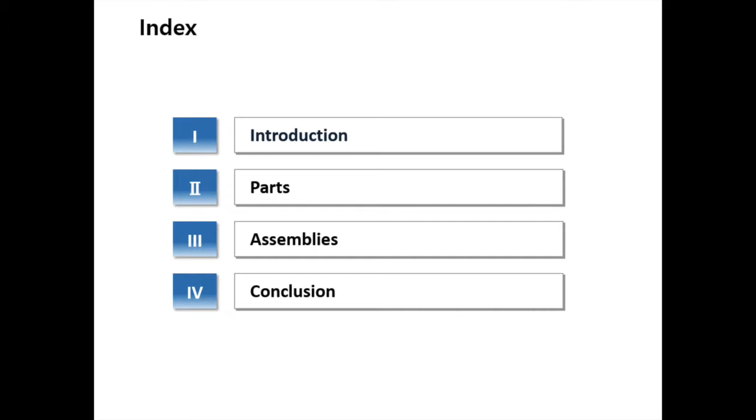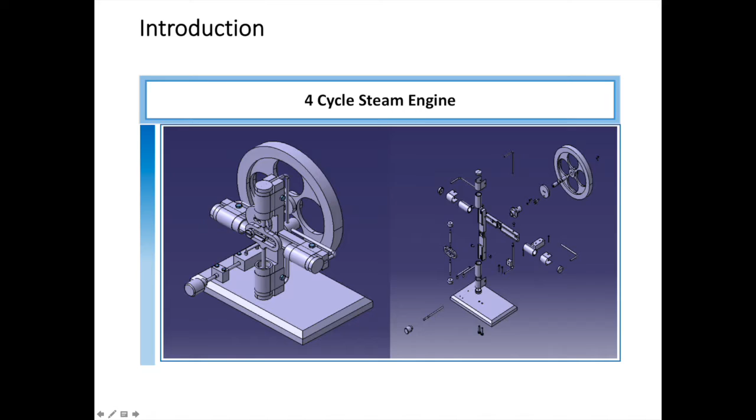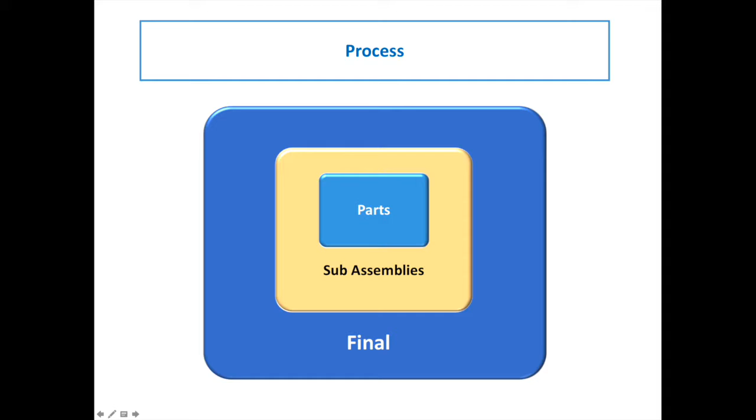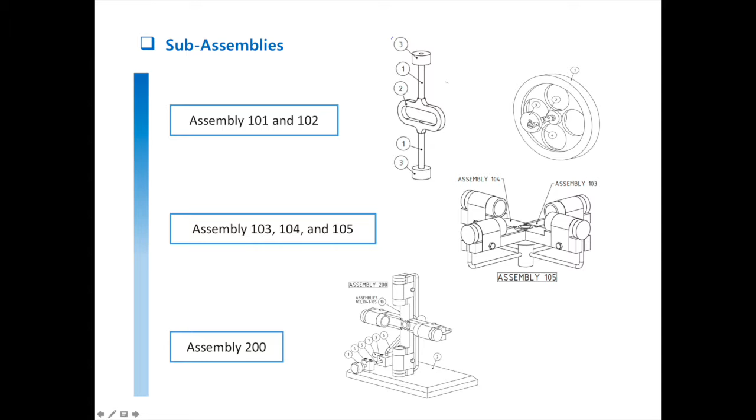For the 4-cycle steam engine assembly, we divided it into 3 big sections. One is assembly 101 and 102. The second one is assembly 103, 104, and 105. And the last one is assembly 200. So I will start with introducing the parts for the sub-assembly in assembly 103.

So I have made a cylinder, for which I used a circle, which I padded out, and then I used the hole function to cut out the hole all the way through. And for the cylinder top, I made another circle with a pad, and then I added another pad within that circle, and then I created 2 holes on the sides.

And for the horizontal beam, I made the front view as the base sketch, and then I padded it outside, and I used the pocket function and the hole function to create it all. And for the cylinder fastener, I just used the arc and padded it out using the profile sketch, and then I used the hole function to pocket the 2 holes. And over here you can see the sub-assembly.

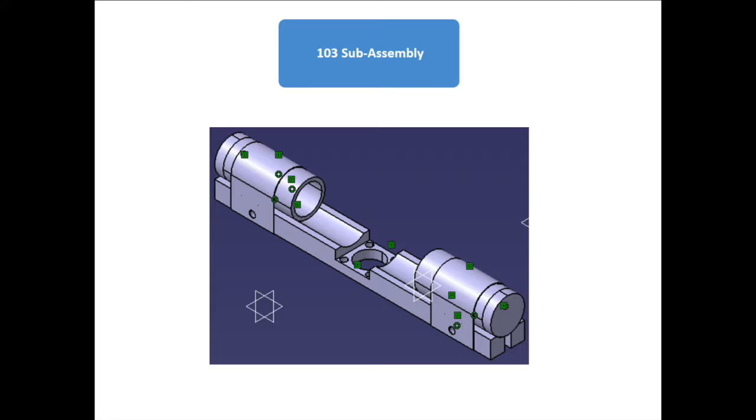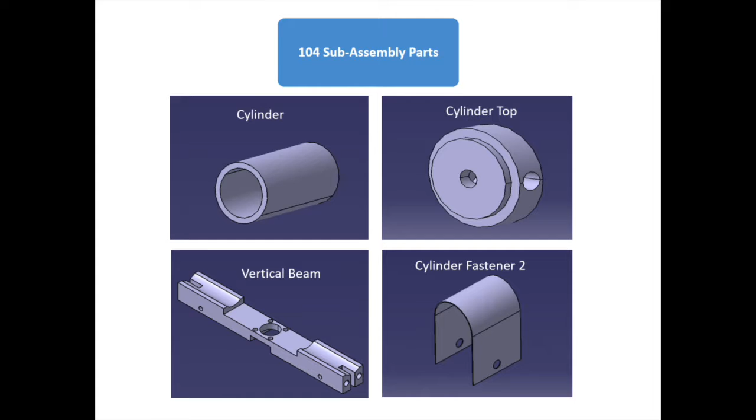And for assembly 104, I did the cylinder and cylinder top as I've mentioned before. And for the vertical beam, I used the same procedure I used in the horizontal beam, which is taking the front view and using that as a base sketch. Also, I have used the same procedure for cylinder fastener 2 as the one I used in cylinder fastener 1. And this is the assembly for 104.

Now for the overall assembly, assembly 200, I made the reversing valve knob, which includes padding and the hole function. For the base plate, I used a chamfer and the hole function to make all those 6 holes. And for the reversing valve housing, I used the pad function from the squares, and then I also used the hole function, and I've used the same procedure for the spindle bracket.

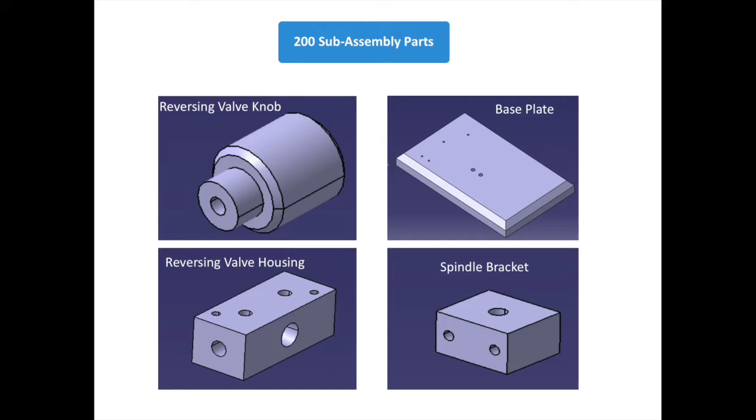Now for the reversing valve, crankshaft bearing, exhaust pipe, and fresh steam inlet pipe, my friend Hyunwoo has made those parts, so I'll just describe how he made them. So for the reversing valve, he used the shaft function, so he just created the profile along the longer cross section, and then used the shaft function.

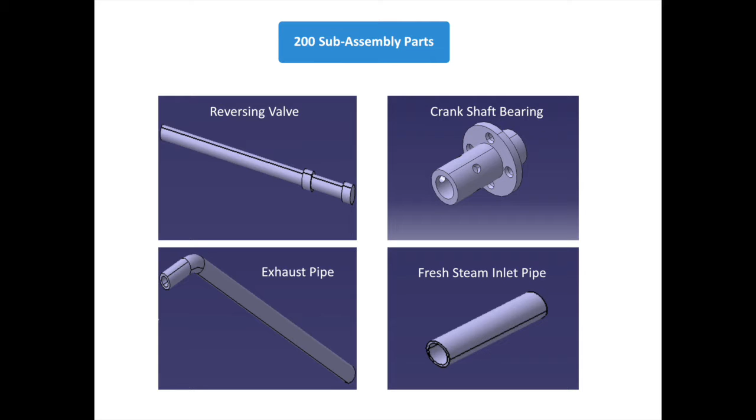For the crankshaft bearing, he used a bunch of circle pads and then he used the hole function to create the holes. And for the exhaust pipe, he created a cross section using the lines in the sketcher for the profile, and then he used the shaft function again to create that circular pipe. And for the fresh steam inlet pipe, which I made, I just used a regular pad function with another pocket.

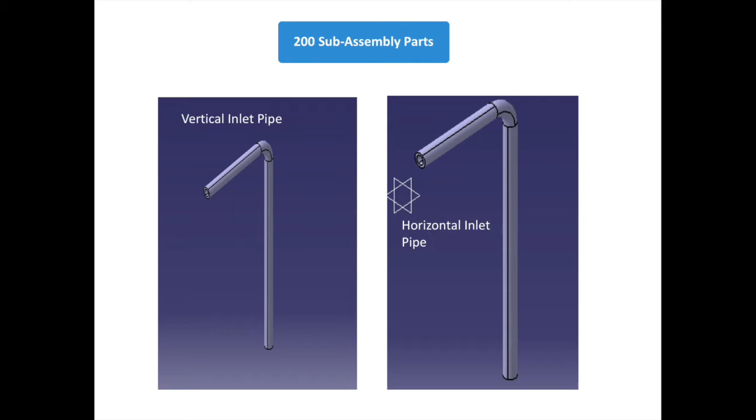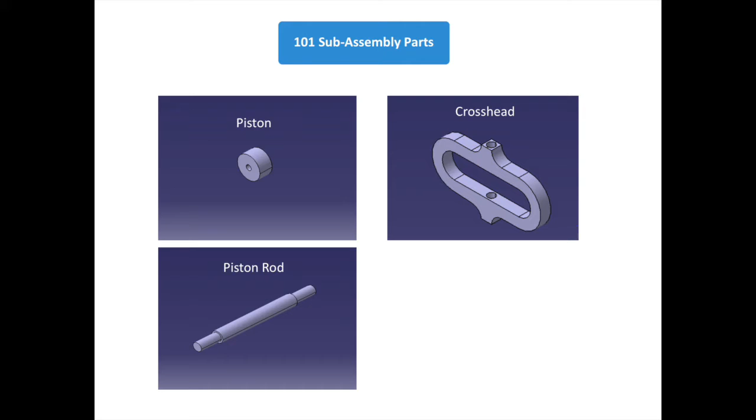With assembly 103, 104, and the assembly 200 parts, we made assembly 200. For assembly 101, there were 3 parts: piston, crosshead, and piston rod. For the piston, I made a circle profile, padded it, and made a concentric hole. For the crosshead, I made a profile of the front and padded it with its depth. For the piston rod, I made half of the side view and used the shaft function. With the piston, crosshead, and piston rod, I made assembly 101.

For assembly 102, there were 4 parts: flywheel, crank plate, crankshaft, and roller bearing screw. For the flywheel, I made a circle profile, padded it, made a smaller circle, used pocket, made a small circle at the top, used the pocket function, and used a circular pattern. For the crank plate, I made a circle profile, padded it, and made 2 holes at the front and 1 hole at the top.

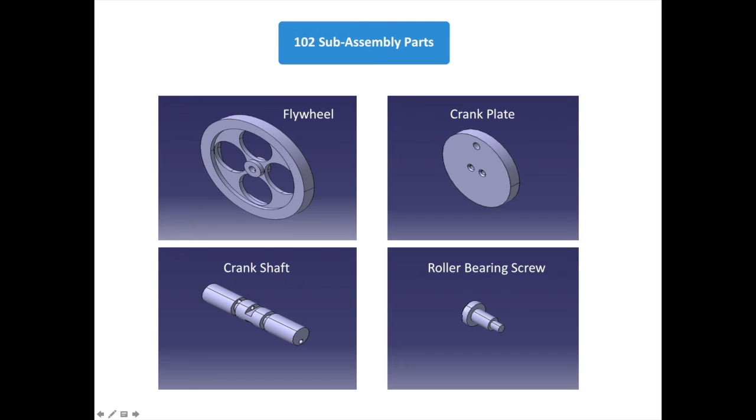For the crankshaft, I used the shaft function to make a cylinder, used the pocket function at the center to make its shape, and used the hole function to make holes. For the roller bearing screw, I used the shaft function to make screws. And this is assembly 102. As a final step, we assembled assembly 101, 102, 103, 104, 105, and assembly 200 together and built the 4-cylinder steam engine.

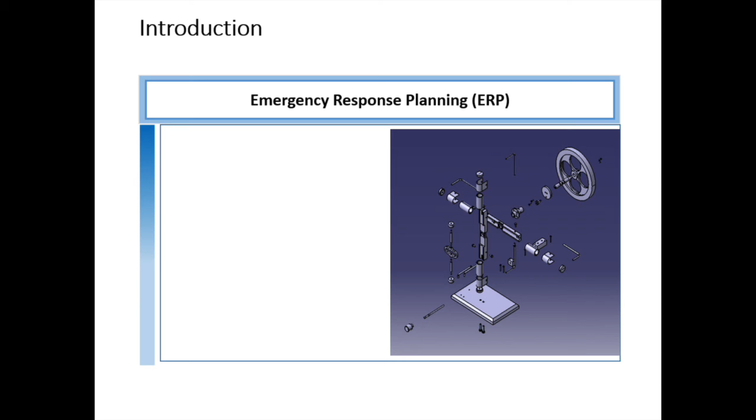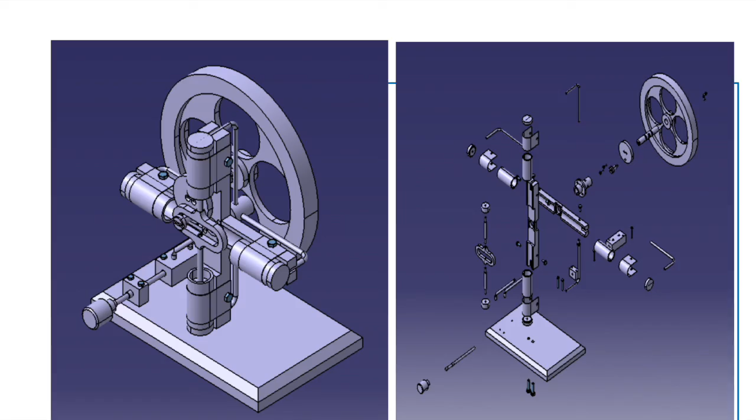After we built the 4-cylinder steam engine, we had a limitation: we were unable to constrain the 2 ends of the exhaust pipe, which is highlighted in the right side picture. However, the overall quality was very good. Every other part except the exhaust pipe fits really well.